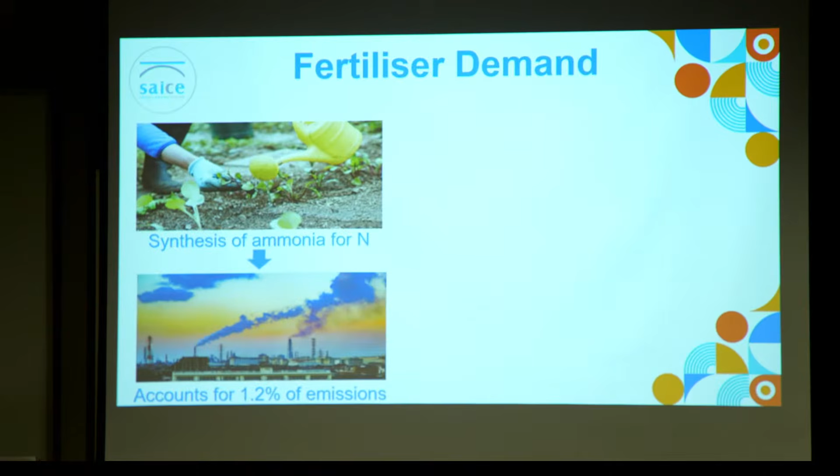Global fertilizer consumption was roughly 190 million tons in 2023, and the three main nutrients found in these fertilizers are nitrogen, phosphorus, and potassium. But producing these nutrients is energy intensive. Ammonia synthesis alone accounts for about 1.2% of global anthropogenic carbon emissions, and phosphorus must be mined from phosphate rock, which is a limited, non-renewable resource, raising sustainability questions about long-term fertilizer supply.

It's therefore important that alternative fertilizer production methods are explored. Now, what if there was a single resource, one we all produced every single day, that could help solve both of these problems? Luckily for us, there is. The solution lies with human urine. Human urine is typically regarded as a waste stream, but from a nutrient perspective, it's actually a gold mine.

It makes up less than 1% of wastewater by volume, but it carries up to 80% of its nutrient load. It also contains the three key nutrients typically found in fertilizers. Furthermore, urine is 97% water, so by recovering the nutrients and the water from urine, we can contribute to broader goals of sustainability and help cities like Cape Town and Johannesburg become more resilient to the growing water security challenges it continues to face. The question that follows this is, where do we do this?

Globally, nutrient recovery from urine isn't new. University buildings, malls, offices, they've all piloted or investigated urine diversion and collection systems. But there is one setting that has not yet been explored, and that is stadiums. Stadiums don't behave like these previously mentioned settings because these settings benefit from a consistent flow of urine, whereas stadiums produce large volumes of urine during events and then nothing in between them. Because of this distinctly different usage pattern, they needed their own modeling and their own analysis.

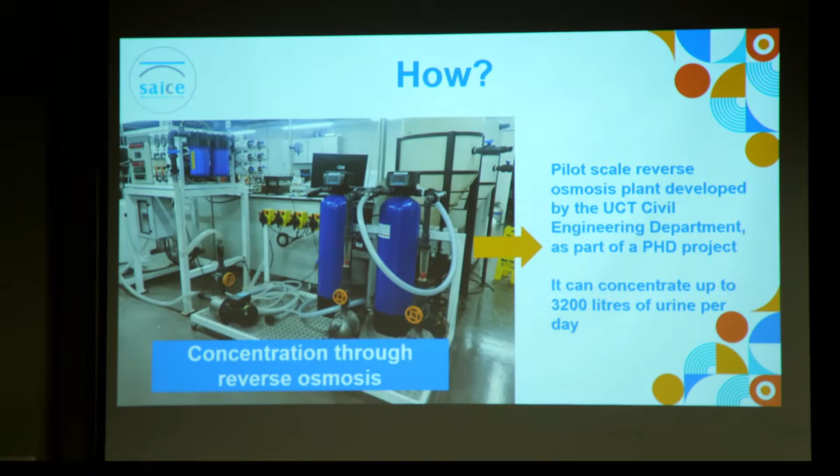The next critical question is, how do we do this? The concentration method chosen for this study was reverse osmosis due to its ability to be applied at scale. Reverse osmosis is the dominant method for seawater desalination worldwide, demonstrating both its reliability and scalability. Reverse osmosis desalinates urine in the same way that it desalinates seawater. It provides us with two product streams: a concentrated nutrient-rich stream, which is the brine or liquid fertilizer, and a permeate, which is essentially just water.

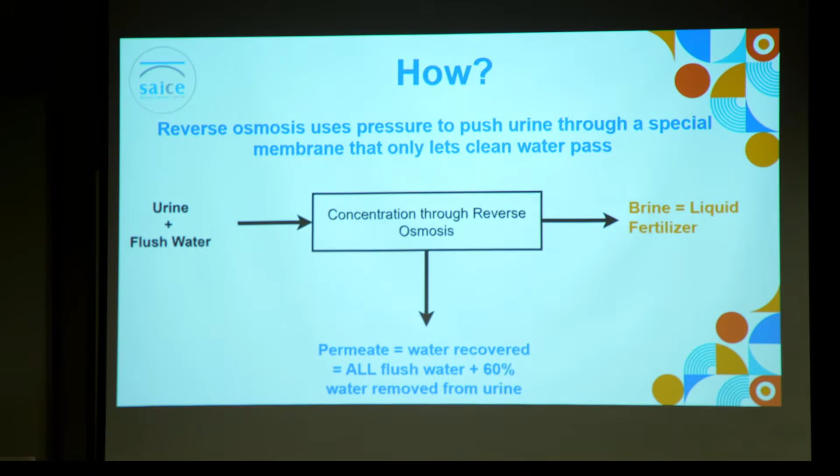Reverse osmosis has the ability to remove all of the flush water that the urine is diluted with, as well as the ability to further concentrate the undiluted urine. For this study, a 60% water removal from the undiluted urine was targeted.

Now, with all that in mind, the core question of my study was refined to this: What is the potential for the Cape Town Stadium to recover nutrients and reuse water on site from urine collected during events? To obtain a clear-cut answer, four objectives were outlined. First was to quantify how much urine the Cape Town Stadium could realistically collect within a year. Second was to estimate both the capital and ongoing operational costs of a practical treatment system. Third was to examine how the dilution of urine with flush water affects feasibility. Fourth was to assess the water-saving potential of reusing the water recovered through reverse osmosis to flush the stadium's urinals.

Sorry, it's just frozen again.

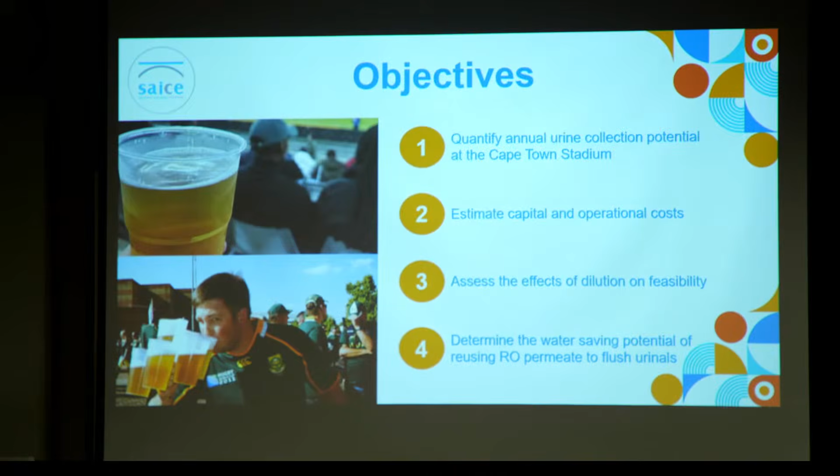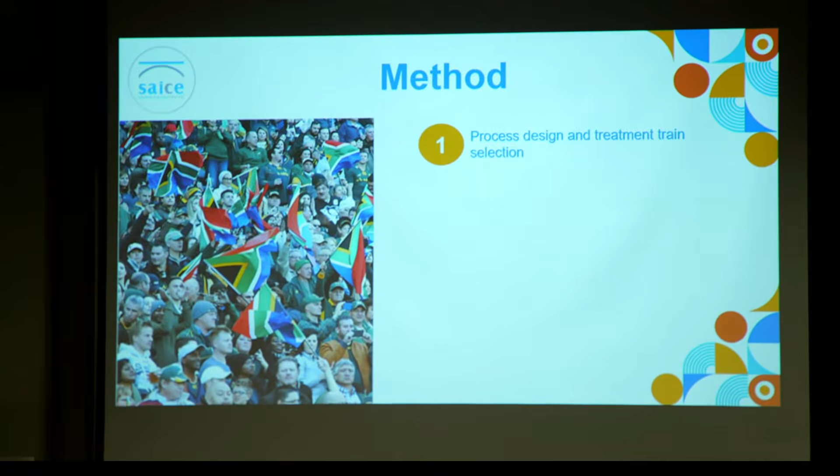To achieve those objectives, the method followed was simple. The study began with designing a treatment train that could be implemented at stadium scale. Next was to gather the data and characterize the site with attendance patterns and fixture counts. With that information in hand, the next step is economic modeling, estimating the capital expenditure, the operational expenditure, and the...

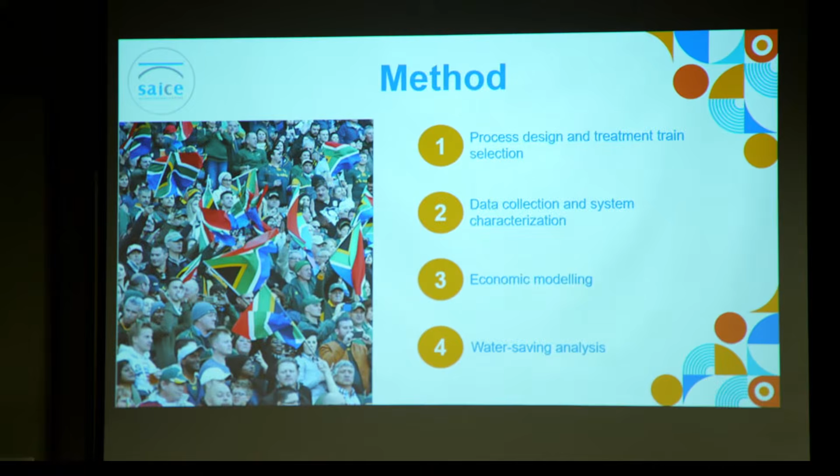revenue potential of the recovered fertilizer. And last, but certainly not least, was the water-saving analysis to quantify how much potable water supply could be offset by reusing the water recovered from reverse osmosis to flush the urinals.

Now let's look at the treatment train designed for the stadium. The fresh urine collected from male urinals only is stabilized with hydrogen peroxide to prevent nitrogen loss. The collected urine is then stored in large collection tanks, and the urine is fed from these collection tanks into the reverse osmosis plant, which can concentrate about 3,200 liters of undiluted urine per day, and it concentrates the urine collected from one event over multiple days.

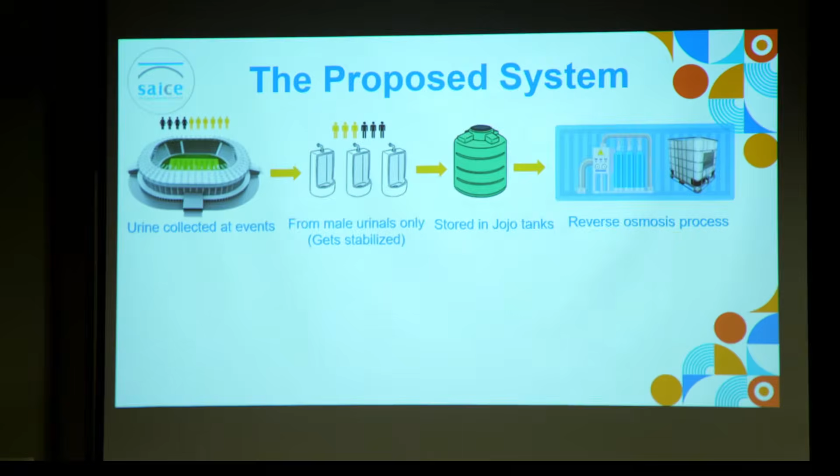The fertilizer produced is then collected in flow bins, and these flow bins are transported to a warehouse facility where the product is packaged and distributed from.

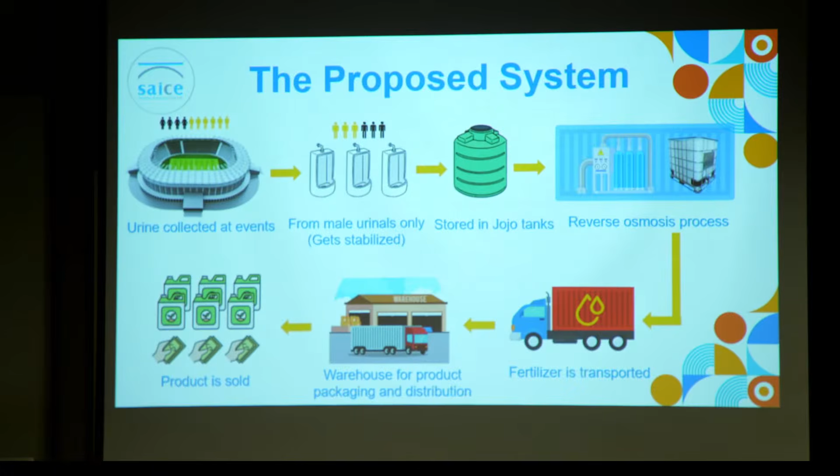This treatment train is fundamentally different from previously done research because it eliminates the need for major retrofitting of existing plumbing fixtures, which significantly reduces the initial capital investment. It uses the urinals in the stadium as is.

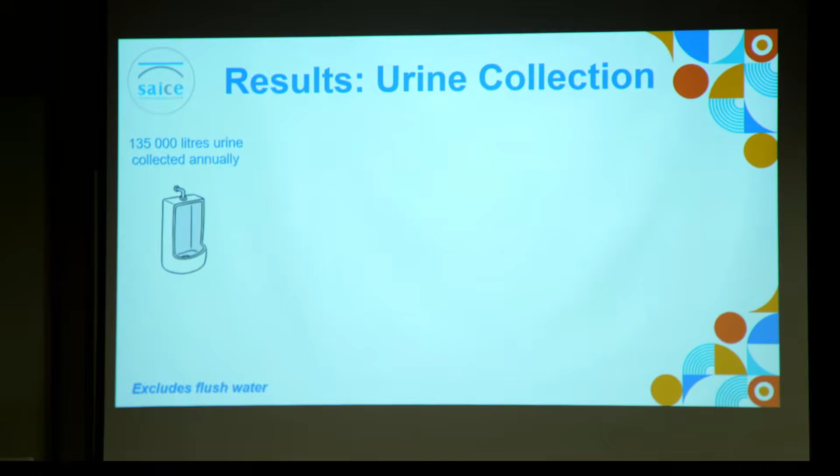Now, let's talk numbers. What I found using the available data for the Cape Town Stadium was that male urinals could yield about 135,000 liters of undiluted urine annually, and by concentrating the stream, we could potentially produce 54,000 liters of liquid fertilizer and recover 81,000 liters of water.

Now let's look at the costs associated with the system. It was found that the modeled system requires an initial capital investment of about 1.47 million rand and has an annual operational cost of 2.9 million rand. And at these costs, the break-even price or the minimum sale price of the liquid fertilizer is approximately 60 rand a litre when calculated over a 5-year investment period.

When we take a look at the fertilizer market, however, it's evident that the fertilizer could be sold at more than double this break-even price when sold to specialist buyers like nurseries or home gardeners. And how did we find that out? So, the weight percent of nitrogen in the fertilizer determines the potential selling price of the fertilizer. The higher the nitrogen content, the higher the price the fertilizer can be sold at.

For a 60% water removal from urine, the weight percentage of nitrogen was calculated at 1.5%. And at this weight percentage, we could potentially sell the fertilizer at 137 rand per litre. And if all the recovered fertilizer is sold at this premium price, the annual revenue can reach as high as 7.4 million rand per year. And this 7.4 million rand annual revenue translates to 4.5 million rand pure profit.

Next, I also analyzed what effect changes in certain parameters would have on the break-even price of the liquid fertilizer, as this would directly affect feasibility. And it was found that the most influential parameters were the operational cost and the volume of fertilizer produced.

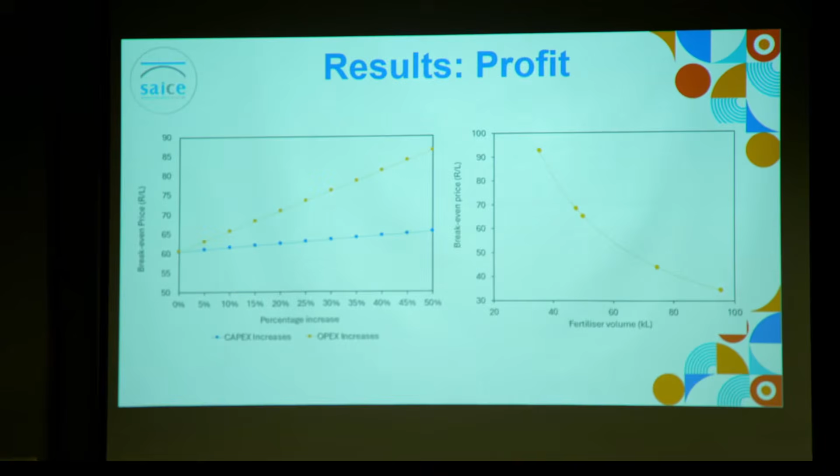Now, let's dive into dilution. Understanding dilution is essential. Dilution is defined as the ratio of flush water volume to pure undiluted urine volume. For example, 100% dilution means that for every 1 liter of urine, there would be 1 liter of flush water, which translates to 2 liters of diluted urine stream.

It's important to note that higher dilution does not change the volume of fertilizer produced annually. Fertilizer production is based on the undiluted urine collection. What dilution does affect is the processing time. The higher the dilution, the longer it takes to produce the fertilizer.

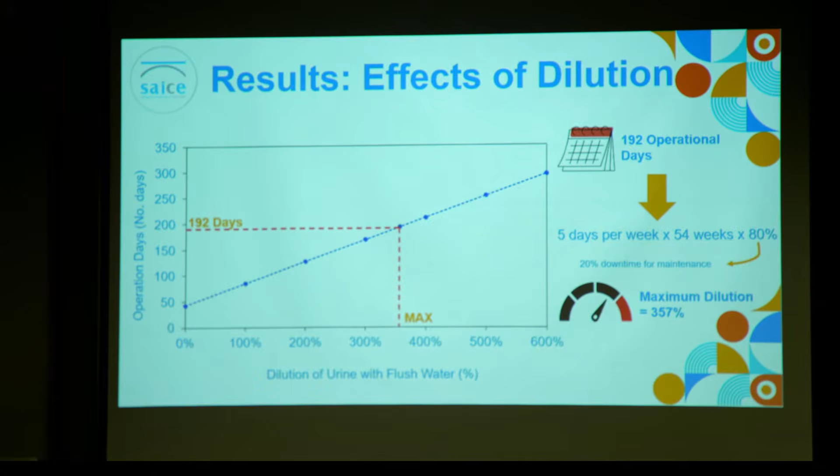The study assumes an annual available operating window of 192 days, so the plant must comfortably process the diluted urine volume within that window. At a dilution of roughly 357%, the current plant with a capacity of 3,200 liters per day reaches the limit of the available 192 operating days, so any dilution beyond this point means we need to increase the plant's capacity.

And finally, the water saving results.

Frozen again. Okay, I want everyone to picture this.

The Cape Town Stadium on a sold-out night. Over 50,000 people watching the Stormers versus the Bulls. The Stormers lead by 5. The lights are flashing and the crowd is cheering. However, behind this spectacle, hundreds, if not thousands of liters of clean drinking water gets flushed away between halves and at the end of the match as everyone leaves the facility without giving it a second thought.

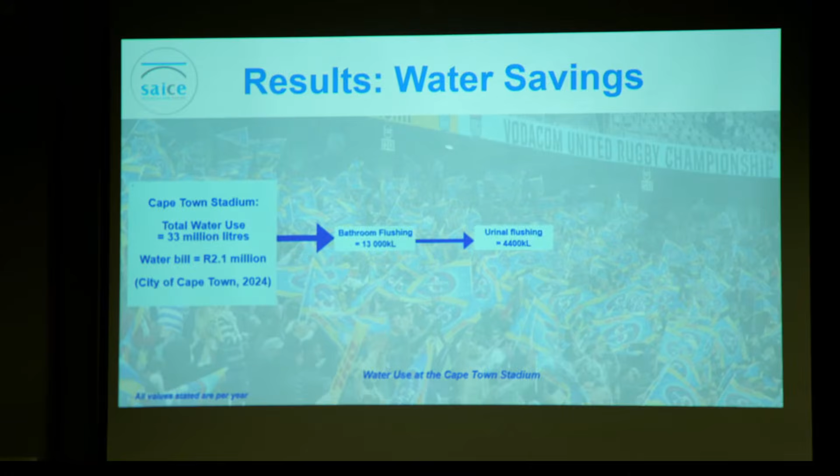This routine behavior is exactly where the challenge lies and where on-site water reuse can make a practical difference. In the 2023-2024 financial year alone, the stadium used 33 million liters of water, of which 4.4 million liters can be attributed to the flushing of male urinals.

Usually, water reuse systems need to supplement water losses in the system, either due to leakages or evaporation, with some form of municipal water supply. This reuse system, however, is truly circular. The extra water removed from the undiluted urine covers any potential losses that may occur in the system, removing the need for municipal water supply entirely.

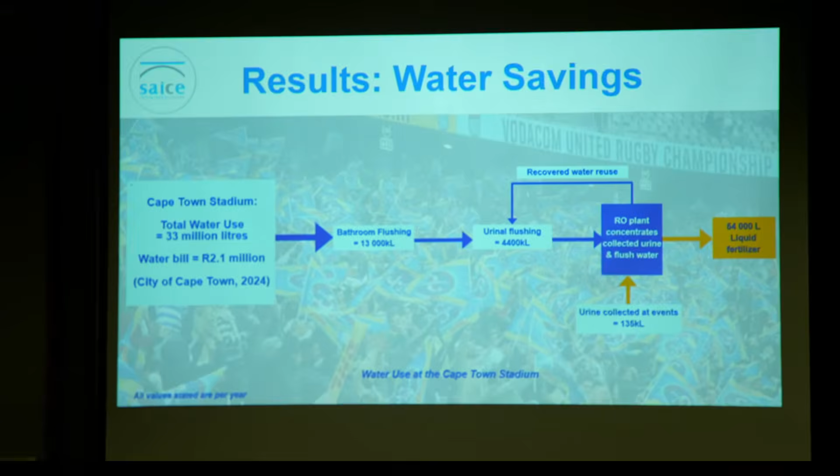For the model system, the water reuse for the flushing of male urinals could save the stadium up to 277,000 rand per year, meaning that through water savings alone, you could cover the initial capital investment cost of the plant within 5 years. Now, based on these results, the next logical step is implementation at the Cape Town Stadium.

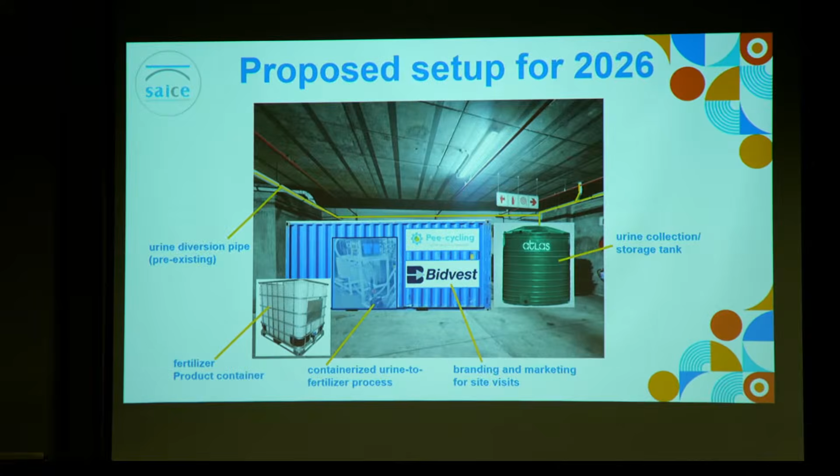The first installation has already been confirmed for this year, supported through partnership with Bidvest, who are working directly with UCT as the stadium's facilities manager. A JoJo tank has already been installed on site, marking the first physical step towards bringing the system into operation.

This research also supports several sustainable development goals as defined by the United Nations, in particular SDGs 2, 6, 11, 12, and 14. How does it do this? For SDG 2, it helps strengthen food security through the local production of fertilizers. For SDG 6, the system improves water management by reducing pressure on wastewater plants and making water reuse more efficient. For SDG 11, it applies circular economy thinking, helping us turn waste into a useful resource.

For SDG 12, it promotes a more responsible way of producing fertilizers. And finally, for SDG 14, diverting the urine from the sewers reduces nutrient runoff into oceans and rivers and protects the ecosystems in these water bodies.

This research also fulfills the 3 ESG principles, and fulfilling these principles was essential for our partnership with Bidvest. Environmentally, it reduces nutrient pollution in water bodies and lowers stresses on potable water supply. Socially, it turns urban settings like the Cape Town Stadium into visible examples of sustainability and supports nearby farmers by producing fertilizers locally.

From a governance perspective, the system is designed around safety, transparency, and clear monitoring, encouraging strong partnerships between local government, sponsors, and researchers.

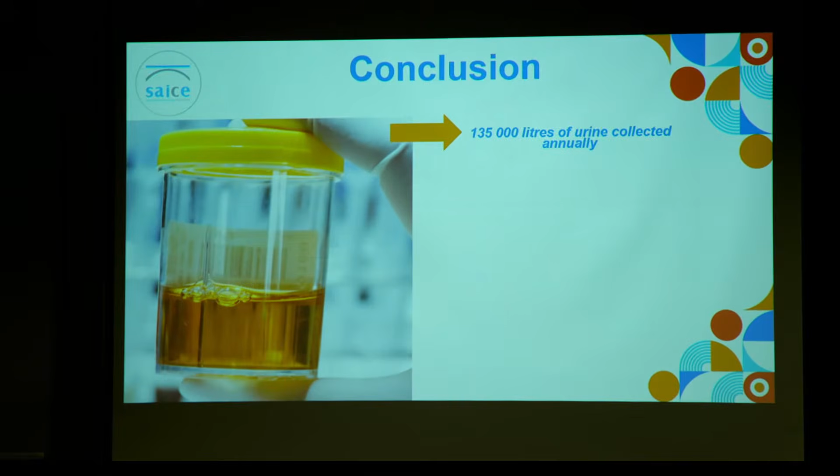In summary, the analysis shows that the Cape Town Stadium could potentially collect 135,000 litres of urine a year, which can be concentrated into roughly 54,000 litres of liquid fertilizer. If all this fertilizer is sold at competitive market prices, we could achieve an annual revenue of up to 7.4 million rand a year.

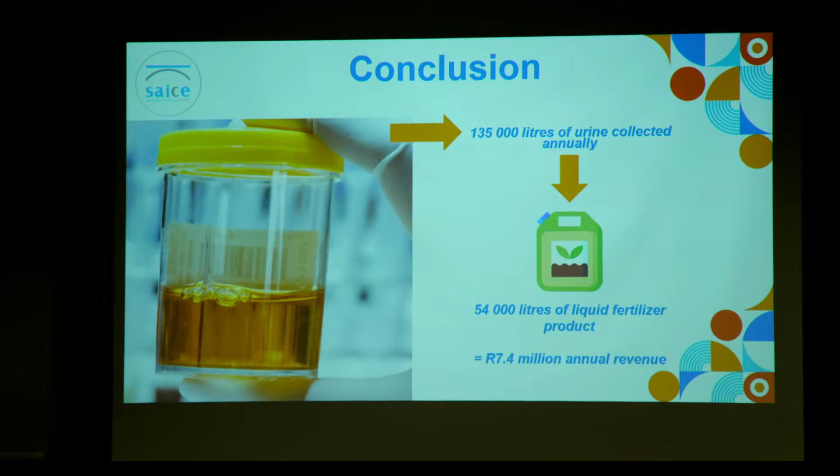There's also the added benefit of an estimated 277,000 rand a year saved if the water recovered from reverse osmosis replaces the potable urinal flushing water supply, which could cover the capital investment of the plant in 5 years.

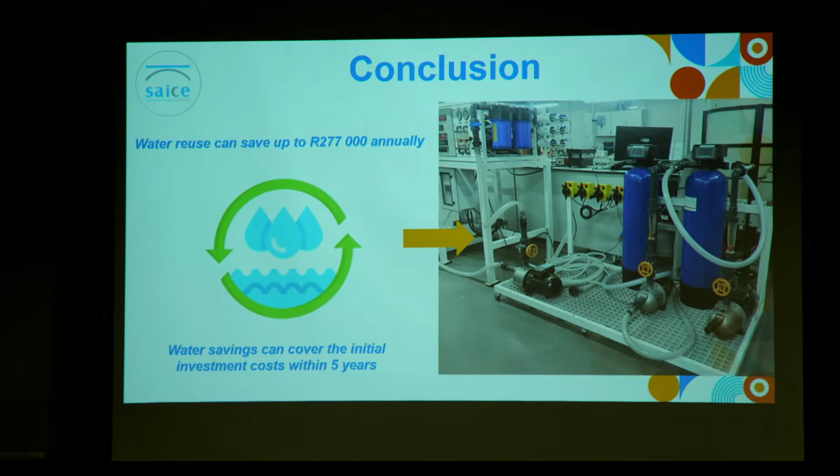This project has the potential to turn the stadium into a visible example of sustainable urban practices, helping cities like Cape Town take a meaningful step towards net zero waste. But the bigger picture is that stadiums are only the starting point. The same model for on-site nutrient recovery and water reuse can be applied in various other contexts, particularly in new large commercial and office developments, hospitals, other event-based venues, and can even be implemented at festivals with portable urinals, where plumbing and services can be designed or arranged to accommodate this kind of treatment system. When implemented in the right context, the model system can scale far beyond a single venue.

The opportunities are endless. I leave you with this: you never change things by fighting the existing reality. To change something, build a new model. Thank you.

Thank you very much, Akila. The only comment I have is that I just couldn't picture that the Stormers were leading by 5. But guys, could you please do 5 minutes of questions? If the judges have any questions first, could you do some questions, and then if the judges don't have questions, we might open up the floor to the audience.

Congratulations on that brilliant presentation. I think it was very thorough. Clearly got the technical acumen. Let me assist you.

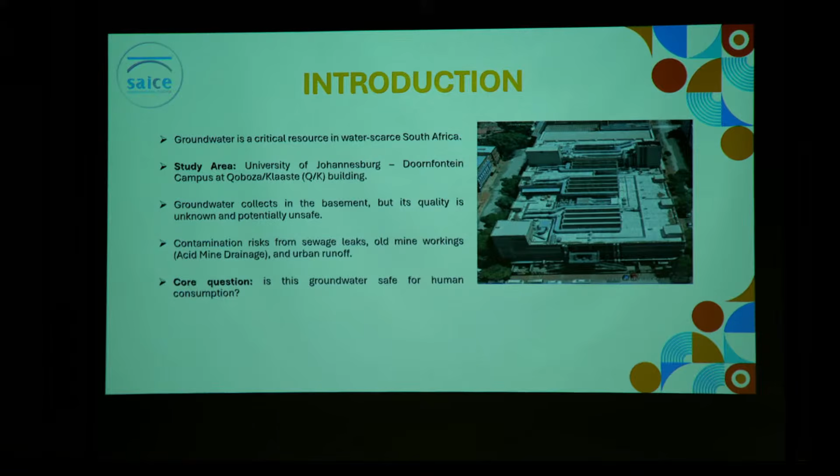Contamination of this groundwater can come from sewage leaks, urban pressures or runoff, or old mines, as we know Johannesburg was covered by old mines. This brings us to the core question: is this groundwater safe for human consumption or not, since students are using it and we don't know?

Moving to the problem statement, which goes hand in hand with my introduction: yes, we do have water that collects at the basement, but is it safe or not?

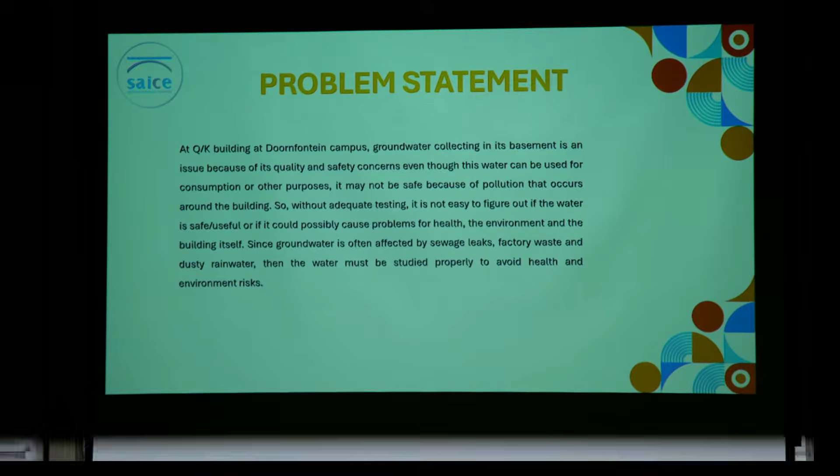This research project has aims and objectives. My aim was to comprehensively assess the quality of this groundwater collecting at the basement and compare it to SANS 241 of 2015. My key objectives were first, to analyze the physical, chemical, and microbiological parameters; second, to identify the key sources of contamination affecting the groundwater students want to use; and third, to provide actionable recommendations for management of this water.

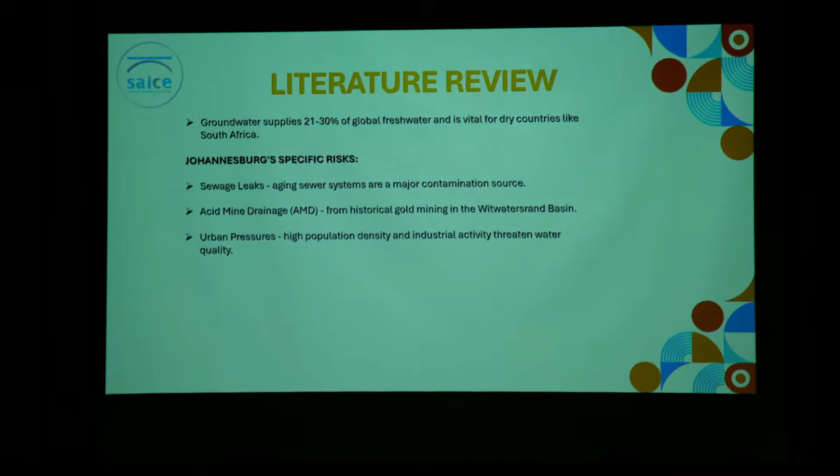Moving to the literature review, based on what other authors have found: groundwater supplies approximately 21 to 30% of global fresh water, and is a crucial source in dry countries like South Africa. I also found that Johannesburg faces specific risks such as sewage leaks, acid mine drainage, and urban pressures.

Moving to the methodology I used, which is divided into two parts: first, research design and sampling, and second, laboratory analysis.

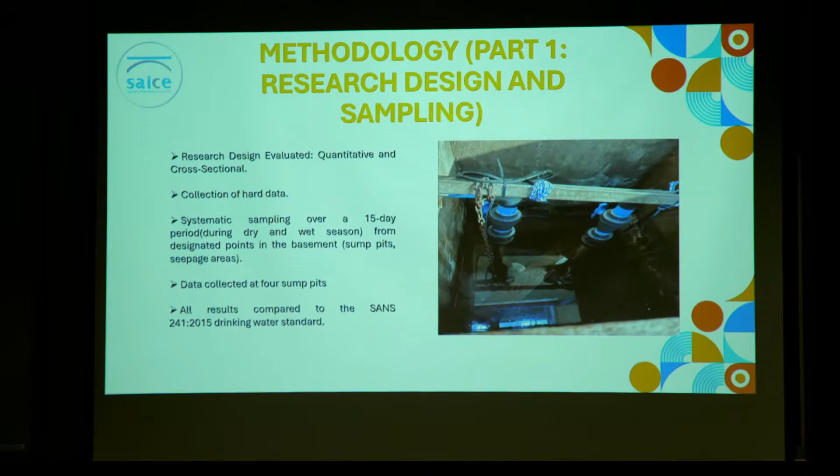I systematically gathered data over a 15-day period during both dry and wet seasons, and compared all these results against the SANS 241 of 2015 drinking water standards.

Then I'll quickly move on to my methodology part 2, which is laboratory analysis. This is where I tested my physical, my microbiological, and chemical parameters.

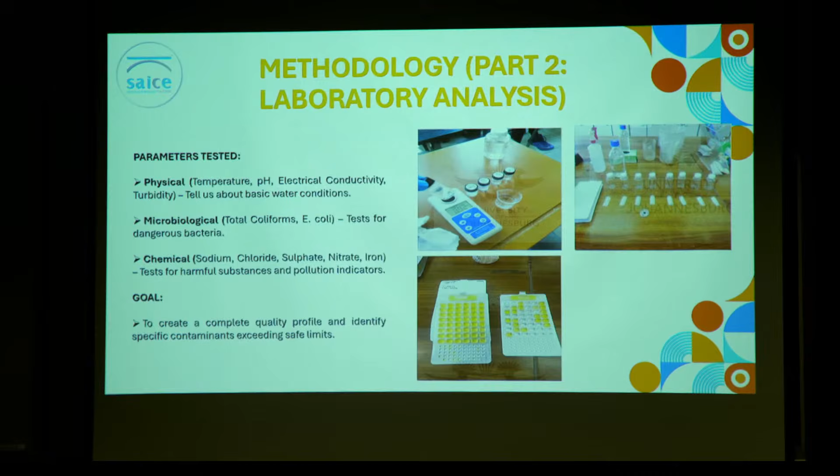My physical parameters tell us about the basic water condition. My microbiological test is for dangerous bacteria, and my chemical test is for harmful substances, indicating what type of pollution it is. The goal was to create a complete quality profile and identify specific contaminants that are exceeding safe limits.

Moving on to my results, I'll start with the physical parameters, which tell us about the basic water conditions. Here I had to test for pH, electrical conductivity, and turbidity.

If you check electrical conductivity, all my samples were okay because they were not exceeding 170 according to SANS 241. If you check my turbidity, some samples were okay, some were not, meaning that this water might have been contaminated by acid mine drainage.

If you check my pH, almost 90% of the values were fine, except on day 5, which had a value of 4.13. This shows that the water is highly acidic. What was the cause? When I went there to take my samples, as I've said, it involves the collection of hard data.

When I went there, there was heavy rain. I wanted to check how groundwater, and also the water table, reacts to heavy rainfall. That is why my pH decreased to 4.13. But the others are all right, falling within the range of 5 to 9.7 according to SANS 241.

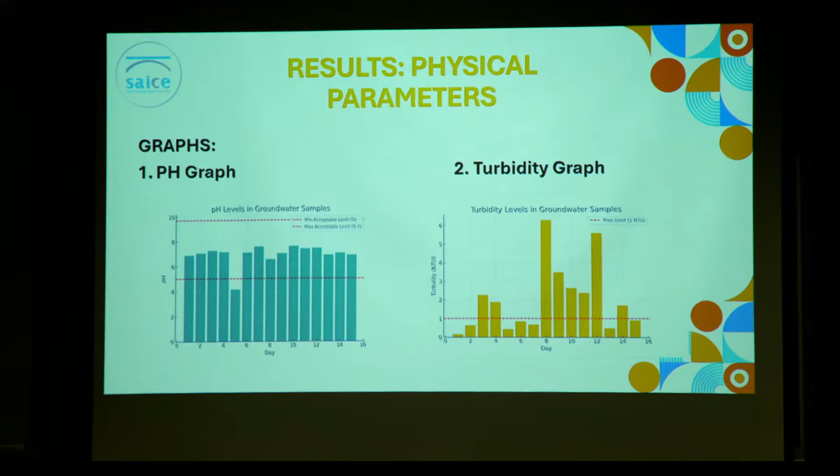Then we have the turbidity graph. As I've said, 50% were good, 50% were not good, also indicating that this water has a big problem. Then I'll quickly move on to my microbiological parameters.

These tell us about the pathogenic organisms. This is where I tested my total coliforms and my E. coli. If you check, all my total coliform values were not okay, exceeding the limit of 10.

This alone indicates that the water is being contaminated or affected by the broken sewages that we have at Johannesburg. My E. coli was supposed to give me 0, or somewhere less than that. Some samples were high, and we even have a very high value there.

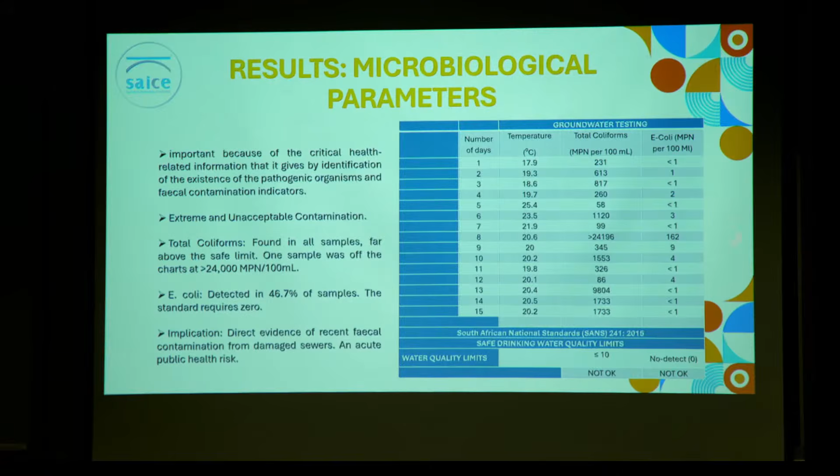Then moving on to my chemical parameters, which is divided into 2 parts. Here I had to test my nitrate, sulfate, sodium, iron, and chloride. All 4 testings were fine, but I had one critical failure when I tested my sulfate. My nitrate was found to be okay.

My nitrate was found to be okay. My sulfate was not okay. My sodium was okay, with all values less than 200. My iron values were all less than 300. Chloride was less than 300 according to SANS 241.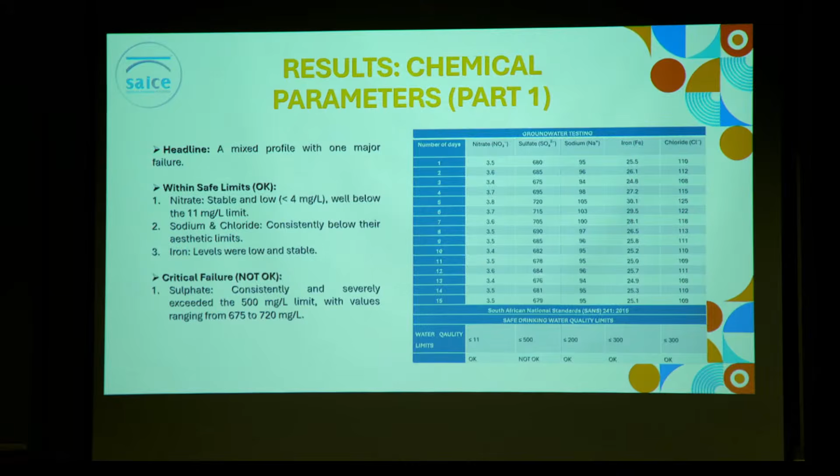But I had one critical failure, which is sulfate. All samples were ranging from 675 milligrams per liter to 720 milligrams per liter.

Moving on to part 2, where I will discuss this critical failure. What was the problem? All these levels were approximately 35 to 44% above the SANS 241 limit. Not even one sample was within the range according to SANS.

What does this mean? Why am I getting this? This indicates that this water has a chronic source of contamination, most likely sewage and acid mine drainage from the historic Witwatersrand Basin gold mines. Other possibilities could be urban runoff or urban pressures and other things, and this can also cause bad taste.

So moving on to my recommendations and conclusions.

My conclusion is that this groundwater is unsafe for human use or for students without extensive treatment, meaning we have to treat it using chlorination and add lime. I also found that the major source of contamination is the leaking sewer.

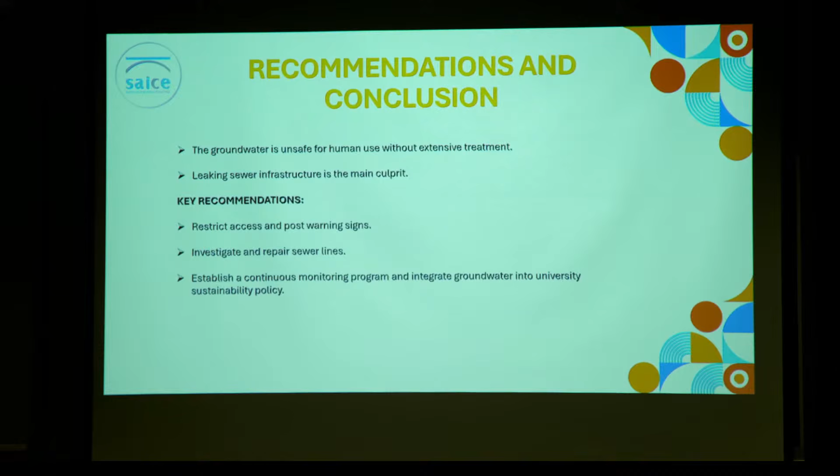My key recommendation is to restrict access and post warning signs. Since it's a university student building, we have to post signs at the bathrooms saying do not drink this water, as it is not safe for human consumption.

We also have to investigate, as the university, and repair the sewer lines, because there are a lot of damaged sewer lines. Then we also have to establish a continuous monitoring program and integrate groundwater management into the university's sustainability policy.

Meaning we have to set up maybe a 30 minute to 1 hour program where we educate students about this groundwater.

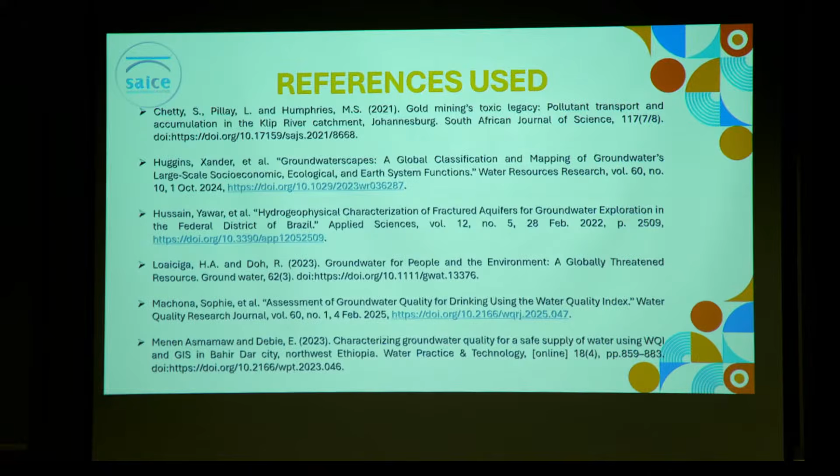Thank you very much for that wonderful presentation. Could we please open the floor up to questions from judges first, and then if we still have time, we'll go to everybody else. That was a very good presentation, and the floor is open.

Thank you for the presentation. You mentioned twice in the presentation that students are already using this water. We then saw that your research concluded the water is unsafe. You mentioned your recommendations were to restrict access, have warning signs, and educate the students. Has any of those three items actually been done?

Has the signage been put up and access restricted? Since this research was done last year, and I was the first one to find out if this water is safe or not, signs were not there before, but now the university is planning to put signs on the bathrooms because this water is being used there. We don't have taps where students can just go with a bottle and pick up and drink. So the signs are being put up right now.

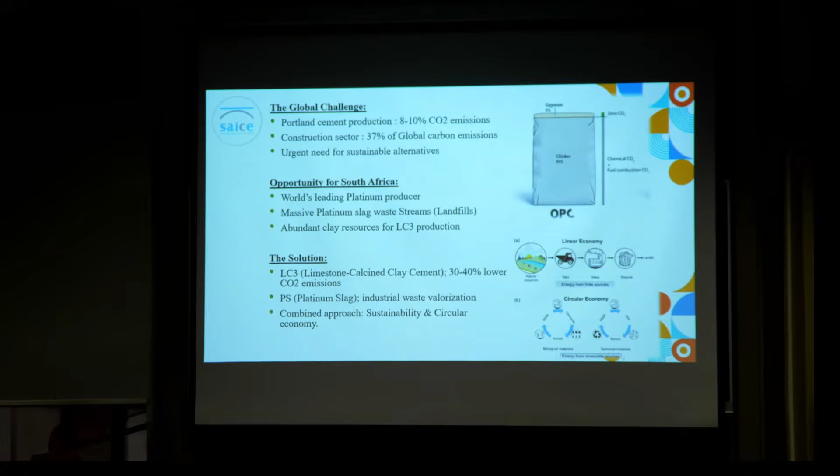We also look at the abundant clay resources available within the country to produce elements such as limestone calcined clay. So the solution came about to take these two materials: limestone calcined clay, which I'll refer to as LC3, and also the platinum slag waste.

The limestone calcined clay has the goal to reduce carbon emissions when replacing Portland cement, and the platinum slag would replace our general or fine aggregates within the concrete mixture. This would also promote industrial waste valorization or recycling within the country.

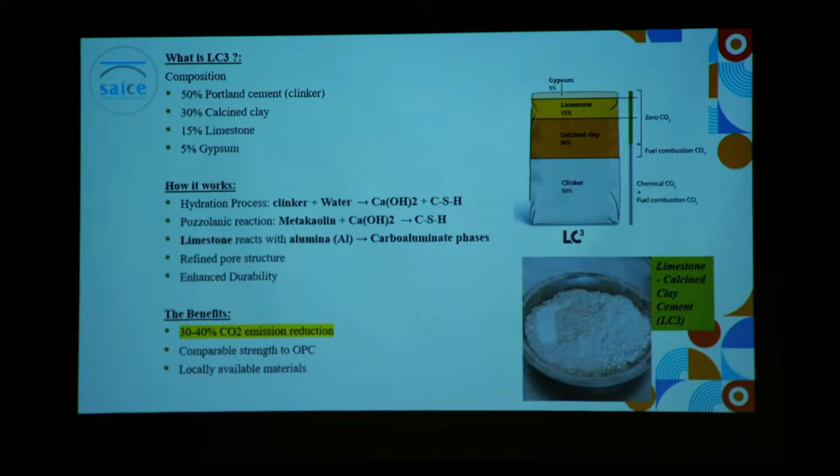Now getting into the first of our study materials, LC3, limestone calcined clay, is an engineered blend containing 50% of normal Portland cement, also including calcined clay, limestone, and gypsum. How it actually works: we start with the hydration process where the clinker content from the Portland cement reacts with water, forming Portlandite, supported by the cementing phase, the calcium silicate hydrates.

The Portlandite produced then goes on to react with the metakaolin, which results from introducing our calcined clay. That metakaolin reacting with Portlandite creates secondary cementing phases, additional bonds within our concrete mixture. Then the limestone reacts with the alumina to form our carboaluminate phases - compounds responsible for refining the pore structure within our concrete mixtures.

Looking at the benefits of using this material: it reduces our carbon emissions by up to 40%, while also giving comparable strength with Portland cement. We are also using locally available materials in this instance.

The second material we are looking at is the platinum slag waste, which is a byproduct of the platinum smelting process, present in abundance currently in our country. We look at its composition with its major and minor oxides, but most interestingly, the amorphous silicates and glass matrices, which give us the benefits of that spherical and glassy morphology.

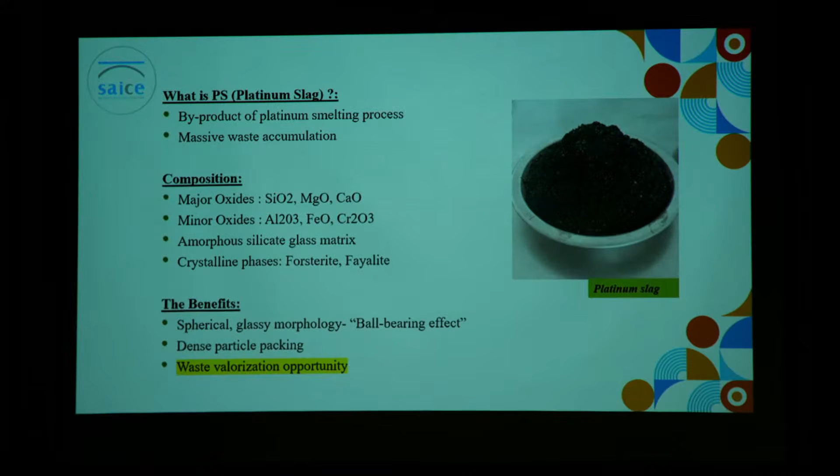This gives us that ball-bearing effect - a reduction in friction within our concrete particles and aggregates, introducing increased workability within the concrete mixture. There's also the benefit of denser particle packing within our aggregates, and the key benefit of valorizing industrial waste being produced in the country.

So to set up the goals for the research: to conduct a comparative investigation on the durability performance and microstructure of the conventional paving block versus the block incorporating our replacement materials at 15% and 45% levels. The Portland cement will be replaced with LC3, and the river sand will be replaced with platinum slag waste.

The experimental methodology I developed before going into the lab was to develop our design mixes, which included 3 of them. The first was the control mix, or benchmark mix, with 0% replacement of Portland cement and river sand. The second and third mixtures replaced it with 15% and 45% respectively.

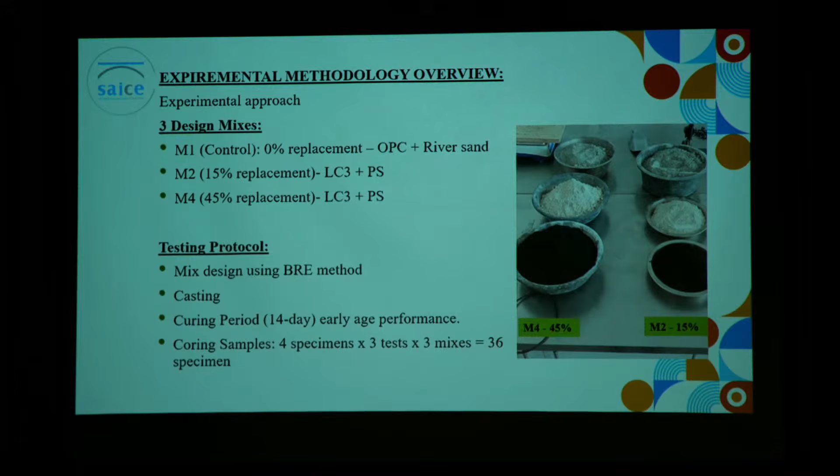To get down to the durability itself and really get the results, the indices we used were firstly oxygen permeability, which determines the resistance for cement-based materials to repel or resist the ingress of oxygen within our concrete samples. Secondly, water sorptivity, which determines the hindrance occurring within that water path due to capillary suction of the surface specimen. And lastly, chloride conductivity, which determines the resistance to penetrating chloride ions within our concrete mixture.

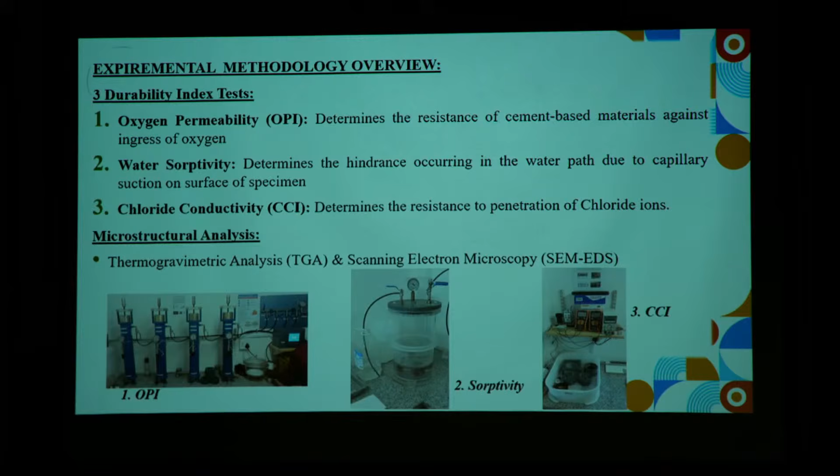The microstructural analysis would then be done to validate our results. Those analyses include the TGA and the SEM analysis.

The procedure followed was as follows: cast in cubic molds, follow a standard procedure of vibration, then cure in the water bath for an early age of 14 days. The specimens were then extracted, cored and saw cut to specific dimensions according to standards, followed by the durability testing of our specimens.

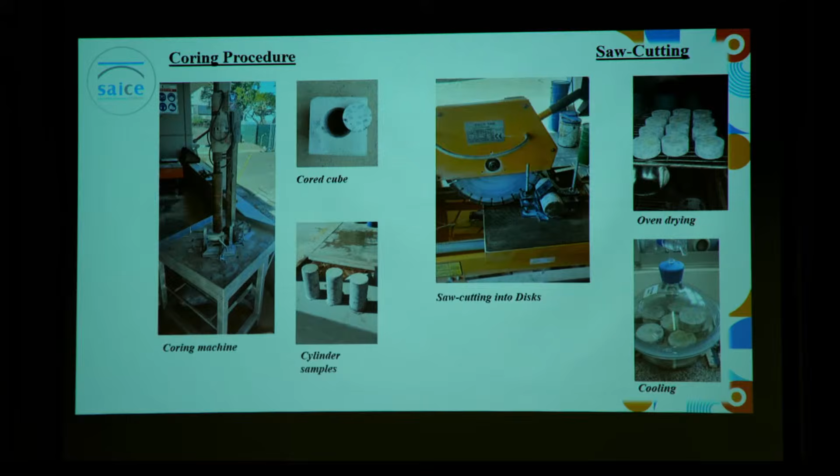So this was just our procedures followed. On the far left-hand side is the procedure of coring our specimens, followed on the right-hand side by the saw cutting of our materials in the lab.

Material characterization was key in order for us to understand the results we would obtain. The key findings here within the SEM analysis is that with the limestone calcined clay, the LC3, it was dominant with our metakaolin and reactive phases, resulting in major pozzolanic activity. With the platinum slag, it gave off favorable physical properties, with forsterite and crystalline phases present there.

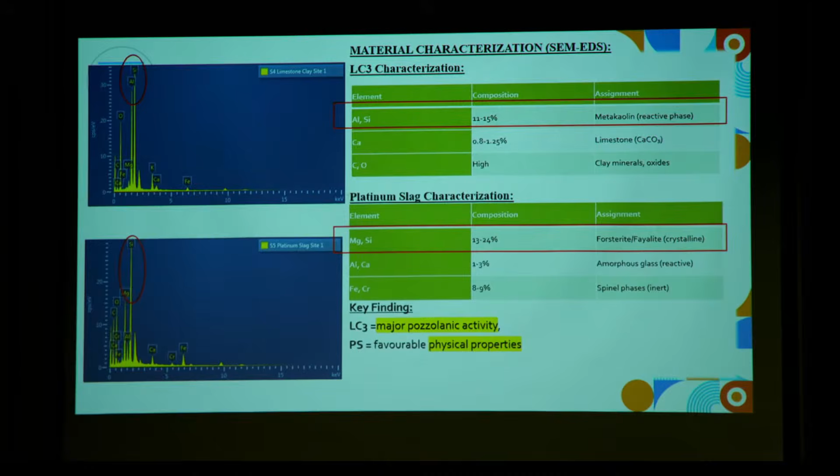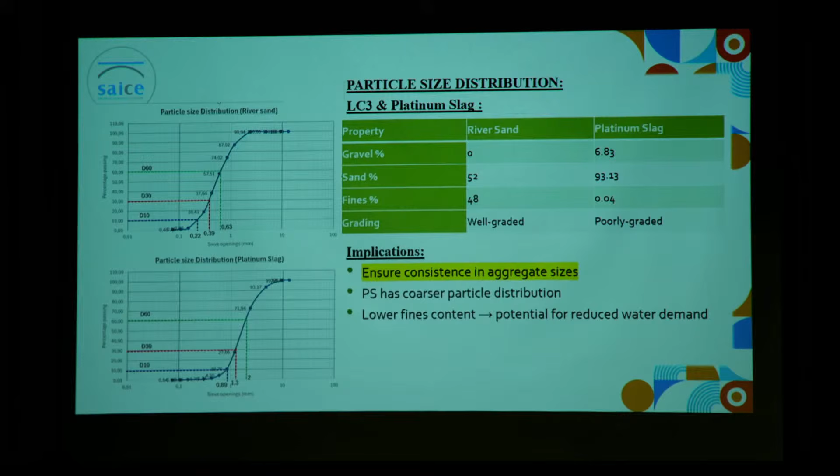Particle distribution was also necessary in order to ensure consistency throughout our mixtures when replacing the Portland cement and river sand and introducing our platinum slag, to ensure that we're replacing with the same amount of fines and larger aggregates.

For the fresh concrete properties, we witnessed that workability improved as we introduced our replacement levels, especially our platinum slag. It improved the workability and flow of our concrete mixture due to the ball bearing effect mentioned earlier, which reduces friction due to the spherical composition of the platinum slag. The practical advantage of this ball bearing effect would be that our water to cement ratio could then be reduced, potentially using less water within our concrete mixture.

Getting into the durability index results, the key findings for that 14-day analysis period was that throughout all our mixes, we identified generally poor results, particularly due to that 14-day analysis, because we normally wouldn't do a durability performance for such a short period of time, but I'll explain as I go further. When we look at M1, the benchmark control mix, we saw the highest OPI due to carbonation within that mixture. Our two design mixes, M2 and M4, with the replacement levels, showed the highest permeability in terms of OPI.

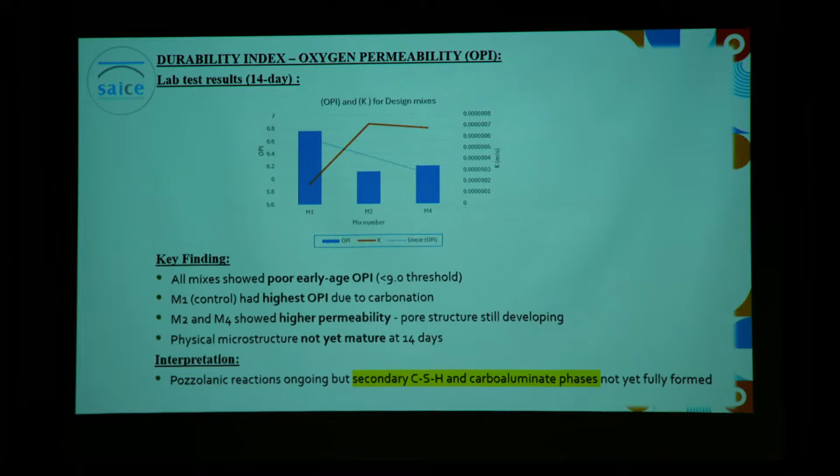This is due to the fact that at this early stage, the pore structure is still developing. It is still at a transitional stage, not yet fully matured. The secondary cementing phases occurring here, due to the metakaolin reacting with the portlandite, are still not yet fully formed to create those secondary cementing phases and carboaluminate phases needed to refine our pore structure.

The second of our indices is the water sorptivity along with the porosity. The findings here were that, similar to the OPI, we were having generally poor results, which was high sorptivity within our concrete mix itself. However, M4 had the highest porosity, yet the lowest sorptivity.

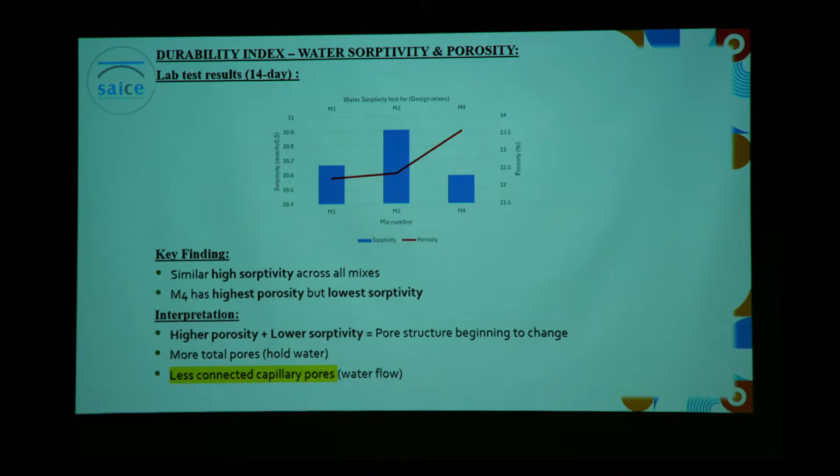If we were to interpret this result, we'd see that due to that higher porosity and lower sorptivity, the pore structure is in a transitional state. Although it is not fully refined with those carboaluminate phases, it is no longer interconnected capillary pores. So the transmission of water is no longer being permitted within our concrete sample.

And then we ended off with our chloride conductivity index, where we saw a progressive improvement when replacing our study materials in our concrete mixes. What we found with the M4 mix was the best performance in terms of chloride conductivity index, meaning it was resisting chloride ingress.

Now this was kind of confusing, because with the other specimens and other tests, like sorptivity and OPI, we were having poor results, but the chloride conductivity was generating much better results.

This was due to the fact that the physical pore structure is still in a development stage. However, if we look at the chemical microstructure, we're already witnessing chemical benefits from introducing our limestone calcined clay.

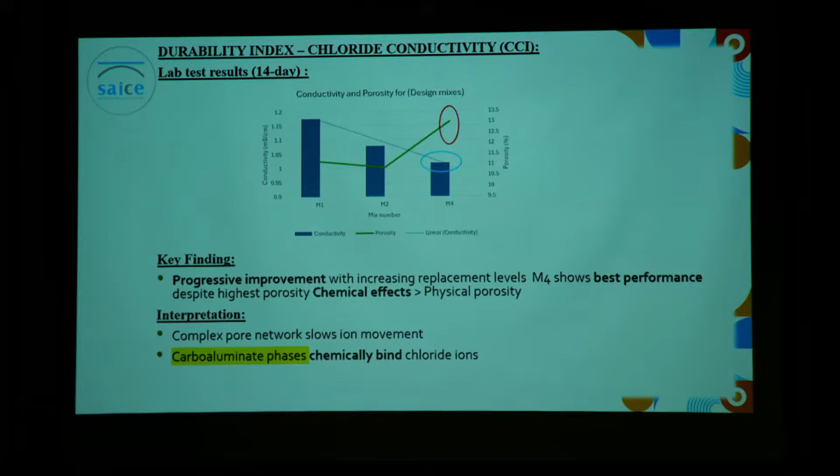This was verified with our microstructural analysis, the TGA, which showed that at that early stage, our LC3 is consuming the portlandite to form additional cementing phases, supporting what I said - that at that early stage, the portlandite is still being consumed, so we're having a temporary increase in pore structure.

However, because we're already developing carboaluminate phases, these phases are binding chloride ions and restricting the ingress of chemicals within the concrete mixture. So with M1, the cementing phases are being generated at a moderate level, and this increases as we go up the replacement levels.

Closing off, what the research really shows is that at the 14-day period, we are still at a very transitional stage, so we cannot get very conclusive results. However, we do see that the physical microstructure is at a transitional state, developing in terms of OPI and similarly with sorptivity.

However, with the chemical microstructure, we are already seeing the benefits of introducing our LC3 in our mixes, with the chloride binding mechanism restricting chloride ingress. So that disconnection - sorptivity and OPI showing poor results when replacing our study materials, but chloride conductivity showing good results - shows that even at this early stage, our chemical microstructure has already developed very much.

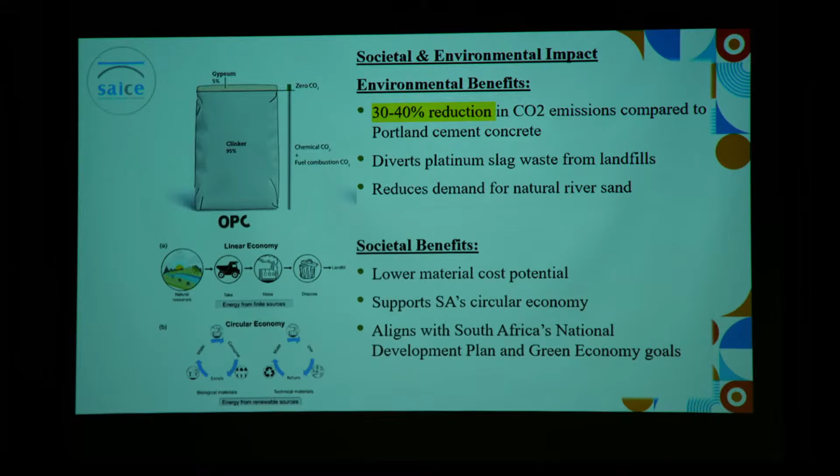To close off with research limitations and recommendations: as you'd anticipate when doing research, a lot of things can go wrong, which I did find during the semester carrying out my research. That's why I stuck with early age analysis - you typically don't do durability performance analysis on the 14th day. Never. We're talking about 28 days, up to 90 and even more. That's when we're talking durability.

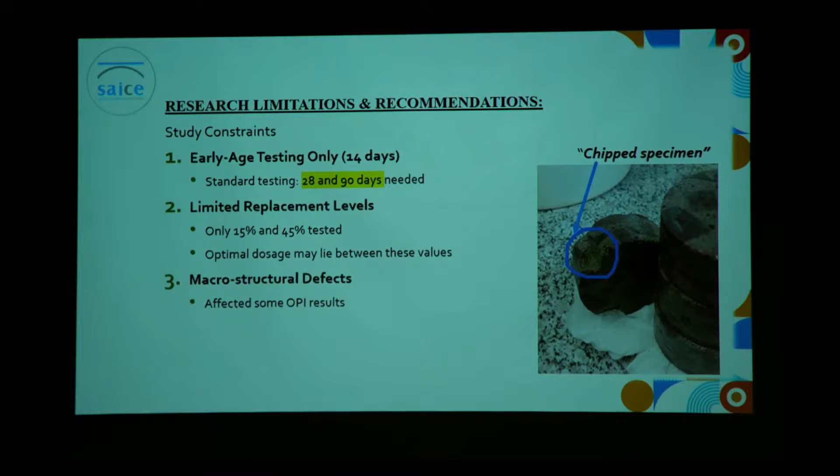However, due to those unforeseen circumstances, I had to make something out of my research, so I decided to reshuffle my objectives and really look at the development stage, the early stage of our concrete mixtures. That limitation influenced the number of replacement levels I had, 15% and 45%. I couldn't find the optimal dosage of replacement, as it could be lying between 15 and 45%. However, we deemed our results promising, as we had seen some benefits.

And just to close off, macro-structural defects were just some of the limitations we faced in the lab. However, our results were recalibrated to suit our analysis. Thank you very much for your time and attention.

Thank you very much, Michelle. That was a very insightful discussion on concrete. From my side, I also do some research in concrete, so I had some comments I wanted to share. But in the interest of time, we can only take some questions from the judges. So let's let the judges ask some questions and then proceed to our next one.

Thank you very much for that presentation. I enjoyed right there when you're covering your limitations, the honesty and that cautious optimism attached to them. I only have one question. It's a very chemically convincing idea, and I'd like to find out, considering that your platinum slag waste has different chemical and mineralogical properties against your natural aggregates, has the study evaluated risks such as alkali silica reactions, or concrete cancer as they call it, under South African conditions when combining this with your LC3? I know it's a long-term thing, and I've seen under your limitations you've captured something, but nothing was talking to this. Is it something you've considered, or at least taken cognizance of moving forward?

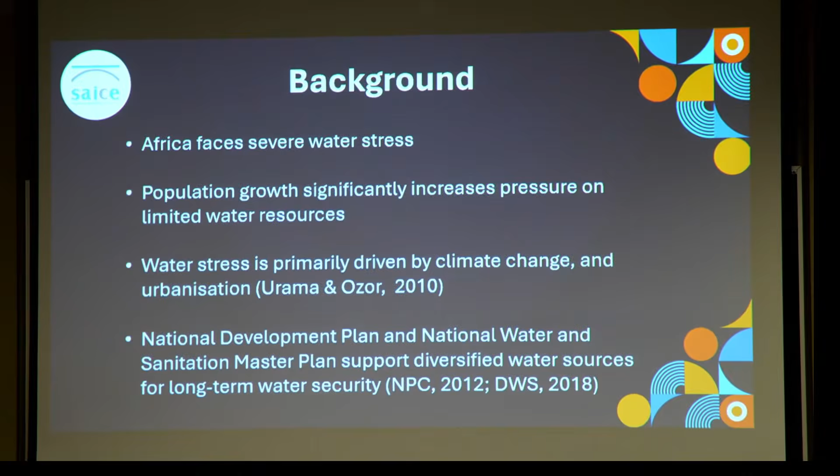The National Development Plan and the National Water and Sanitation Master Plan highlight the need to optimize South Africa's water resource mix and promote non-conventional supply options beyond traditional surface water sources to ensure long-term water security. Long-term alternative strategies include better use of groundwater, stronger water demand management, expanded water reuse, and desalination. In this project, desalination was explored as the alternative supply strategy.

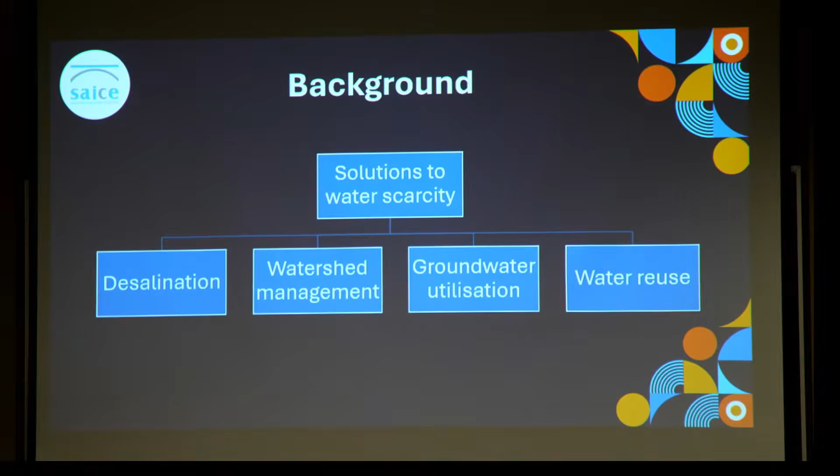Water desalination is the process of removing salts and other minerals from seawater or brackish water to make it suitable for human use. Several methods exist, with thermal techniques like multi-effect distillation and multi-stage flash relying on heat to evaporate and condense water, but these require high energy input. Due to the global need to conserve energy, reverse osmosis has become the dominant approach.

Its principle is simple but effective: by applying pressure, saline water is forced through a semi-permeable membrane, leaving salts and impurities behind. Today, reverse osmosis accounts for nearly 70% of the world's desalinated water supply. However, it is not without flaws. Arguably, its biggest flaw is membrane fouling, wherein particles, microorganisms, or other materials accumulate on or within the membrane, reducing its efficiency.

To address this, researchers have explored incorporating polyionic liquids into membranes to improve their structural strength. Ionic liquids are charged compounds that remain liquid at relatively low temperatures. Polyionic liquids are polymers that integrate ionic liquids into their structure, combining the chemical stability of ionic liquids with the structural integrity of polymers, making them suitable for improving reverse osmosis membranes.

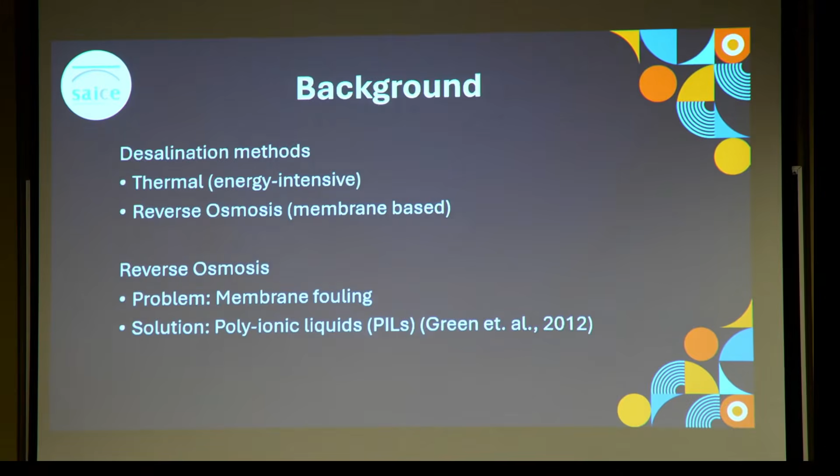Researchers have conducted many studies on the effect of polyionic liquids on membranes, and this research has shown that excessive amounts of polyionic liquids can actually be detrimental to membrane performance, as it compromises the selectivity of the membranes. However, all of this research focuses on remaining safely below that upper limit. In contrast, our study deliberately approached this threshold, aiming to identify the precise point at which performance begins to decline, a boundary that has not yet clearly been defined.

This leads us to a question: how much PIL can be incorporated into reverse osmosis membranes before performance begins to decline, and what structural changes might occur as a result? To answer this, our objectives included fabricating reverse osmosis membranes with varying percentage rates of our PIL of choice, characterizing the surface properties of these membranes, and testing their performance to determine how efficiently they function under operating conditions.

To achieve the objectives of the project, the methodology was divided into three parts: membrane fabrication, membrane characterization, and performance testing. For the membrane fabrication step, two processes were carried out: first, casting the support membranes, and second, forming the polyamide layer, also known as the active layer, on top of the support membranes using interfacial polymerization.

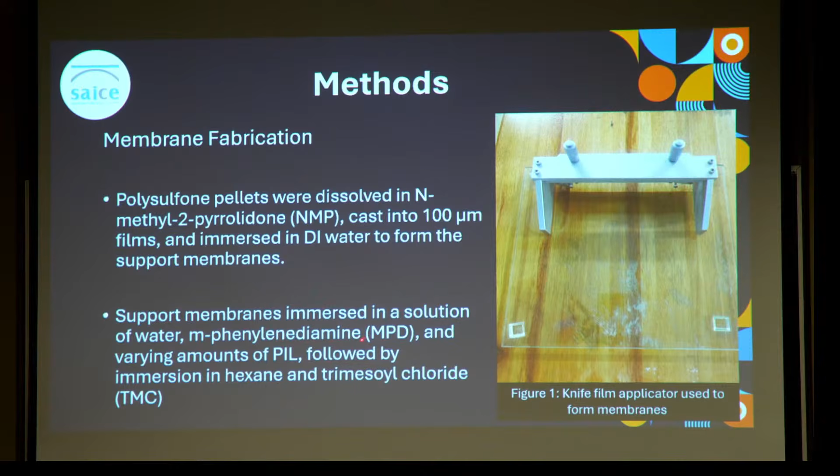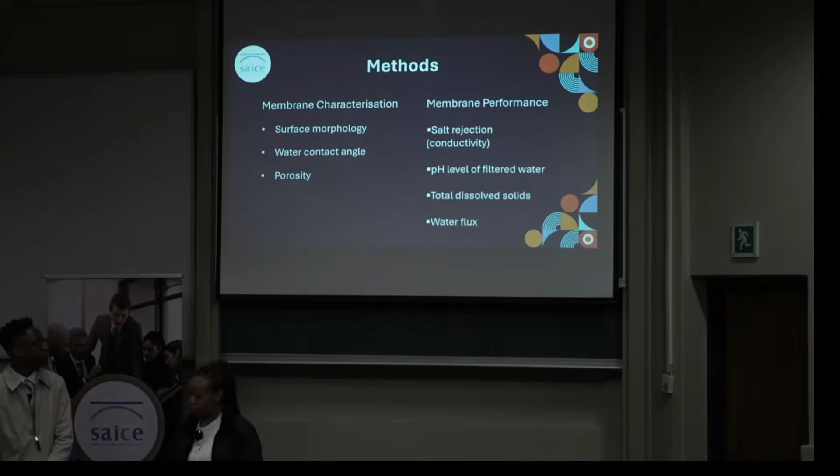To understand how these compositional changes affect the membranes, membrane characterization was carried out. Membrane characterization involves studying the properties and behavior of membranes, which is essential for their efficient application and for determining the most suitable operating conditions in separation processes.

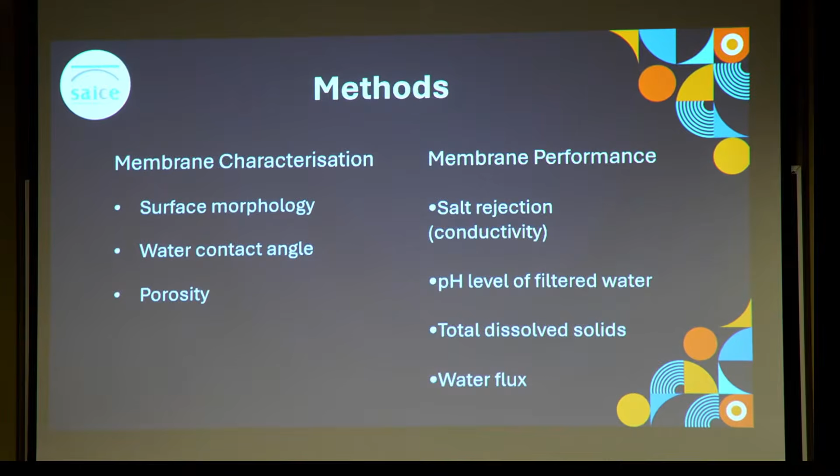For characterization, we measure the water contact angle, which is the angle formed between a water droplet and the membrane surface. This indicates surface hydrophilicity. We also determine the porosity and characterize the membranes in terms of their surface properties. To evaluate membrane performance, the conductivity, total dissolved solids, and pH of the filtered water was measured, and then the salt rejection and water flux of the membranes was determined.

In terms of handling, the membranes demonstrated generally good structural integrity, and they could be lifted up without deformation, which was a sign that they possessed sufficient flexibility and robustness for practical applications. These favorable mechanical characteristics are also expected to hold true in larger industrial productions, as they depend on intrinsic chemical properties and not the dimensions of the final product.

Finally, after undergoing interfacial polymerization, the membranes did not display any visible physical alterations. This lack of observable change on the surface indicates that the interfacial polymerization process proceeded uniformly, imparting the expected functional properties on the membranes without affecting their physical appearance.

Turning our attention to the characterization of the membranes, several important trends were observed. The water contact angle results showed that all the membranes were hydrophilic, with values below 90 degrees confirming their suitability for desalination. Interestingly, the introduction of PIL produced a nonlinear effect on hydrophilicity. Small additions of the PIL initially increased the contact angle, but further incorporations in membranes 3 and 4 significantly reduced it, indicating improved hydrophilicity.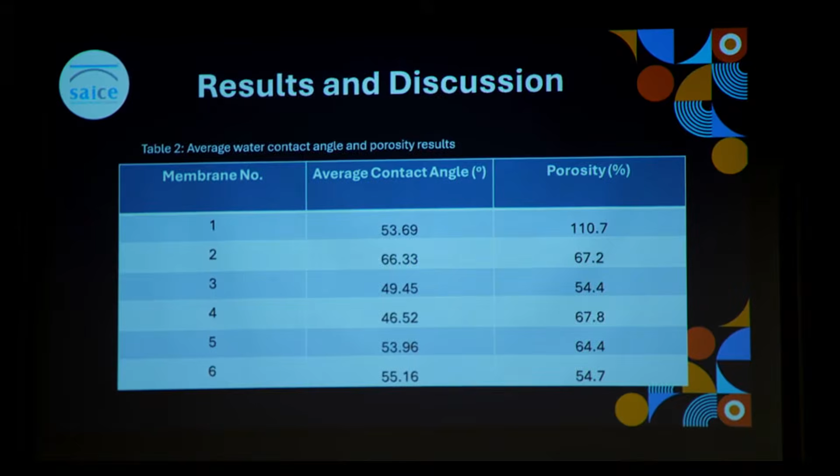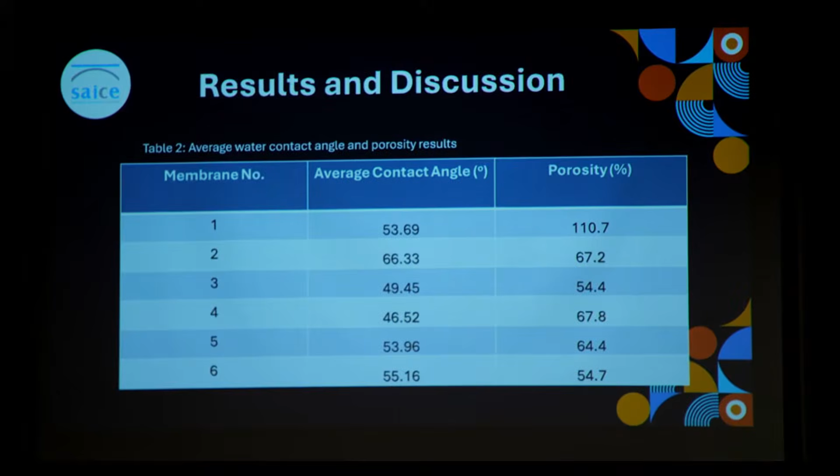Porosity measurements further confirmed the complex influence of PILs on membrane structure. While most of the membranes had moderate porosity, membrane 1 stood out with a value above 100%, which is not physically realistic. This was likely due to membrane swelling or experimental variation. Overall, the lack of a consistent trend suggests that factors such as swelling behavior and structural distortion play significant roles in determining porosity.

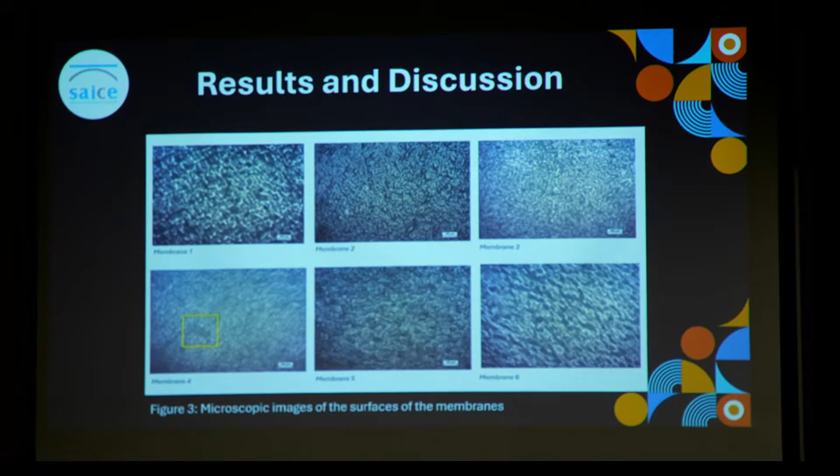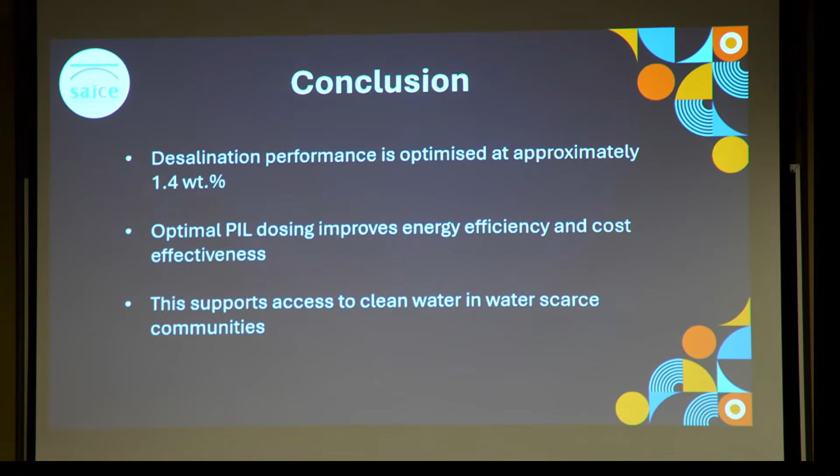Ultimately, advancements like these contribute to making desalination a more viable solution for water-scarce regions, helping to improve access to clean water, particularly for underserved and vulnerable communities, while also reducing the environmental footprint associated with large-scale water purification.

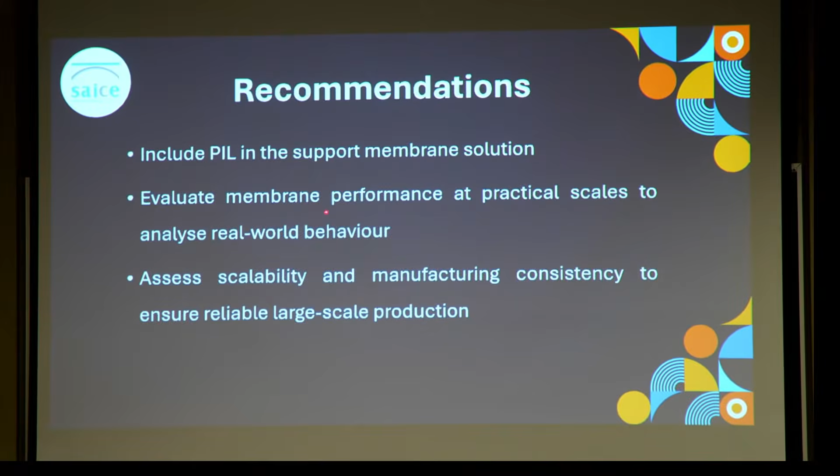It is recommended that future investigations incorporate the PIL into the membrane support solution rather than adding it after the support membranes have already formed, to better improve integration. It is also recommended that larger membranes be fabricated and tested to better align the results with what is expected in commercial desalination plants. Thank you.

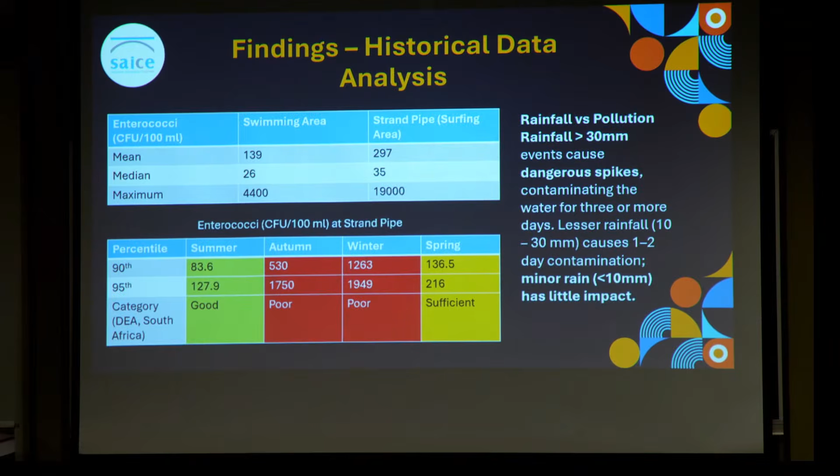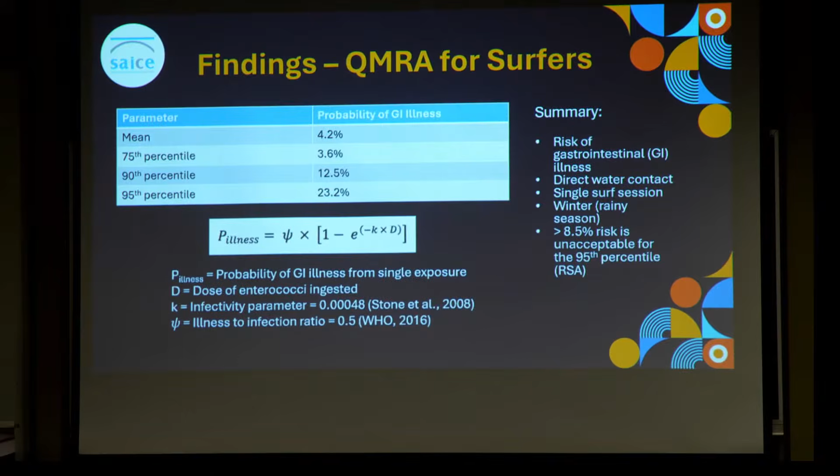Now moving on to the potential sources in the area, there are several interconnected sources that are driving the poor water quality, especially in winter. The Lourens River acts as a conduit for all the pollution from upstream, which includes urban areas, informal settlements, and agricultural land. So this contamination is carried downstream and released straight at the river mouth, which is very close to the surfing area at Strand.

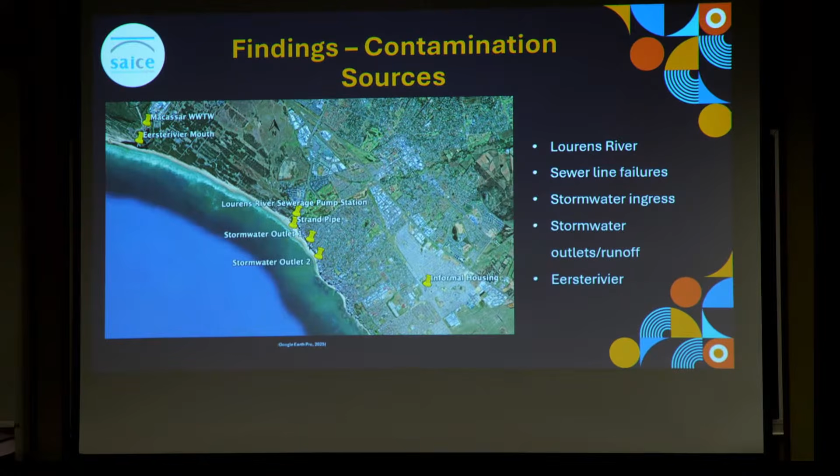So yeah, the surfing area experiences worse contamination compared to the swimming area, which is just down the beach. And that shows in my field sampling results as well.

Just an interesting one, the sewage pump station located at the river mouth failed in July 2025, and it coincided with some very high pollution levels recorded.

The sewer network in Strand is also a problem. The sewer line is a gravity-fed sewer line which carries flow from the whole of Strand down to that pump station, and it has a history of blockages and spillages. It collapsed in February 2025, and it caused a major overflow with beach closures.

Heavy rainfall obviously adds to the stormwater and the gravity-fed sewer system, and this can overload the pump station and cause further leaks.

On top of that, the stormwater outlets along the beach, including two very close to the main swimming area - those two that are tested - carry high levels of bacteria. This is likely from leaking sewage, urban runoff, and areas with poor sanitation, such as that one I highlighted there in the picture.

And finally, the Eersterivier, which enters the ocean less than 10 kilometers away, can bring additional pollution. This is where the pump station pumps all of its sewage to, and that's located right at the river mouth. So any spillages or problems there, the sewage can go straight into the ocean.

So what does this all mean? Well, I confirm that rainfall is a major driver of coastal pollution, and that it lingers in the sea for quite a while, depending on the intensity.

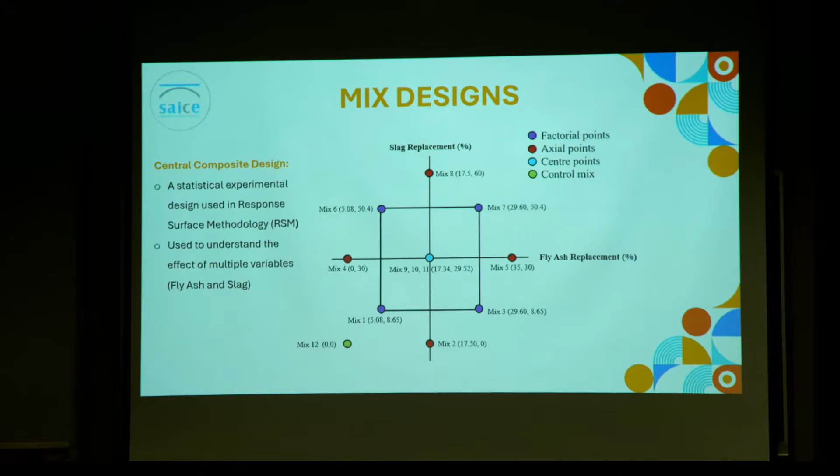A total of 11 mix designs were obtained from the central composite design, with the 12th mix containing no slag and no fly ash to serve as a reference.

All cements were tested under SANS and European standards, allowing cements with low clinker content to be classified as CEM6s, a classification that has not yet been standardized in South Africa.

The research evaluated the performance based on fresh properties such as workability and heat of hydration, mechanical properties including compressive and splitting tensile strength, and durability through oxygen permeability index, porosity, and carbonation. All tests were conducted under 2 curing regimes: a 25-degree water bath, and outdoor curing to simulate on-site conditions.

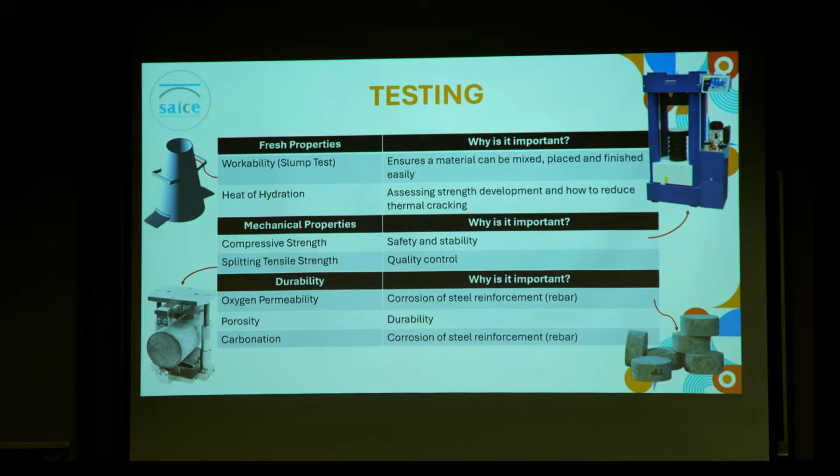The purpose of conducting such a range of experiments was to ensure that the results are evaluated comprehensively. This holistic approach strengthens the findings of the results and also shows its viability for real-world application.

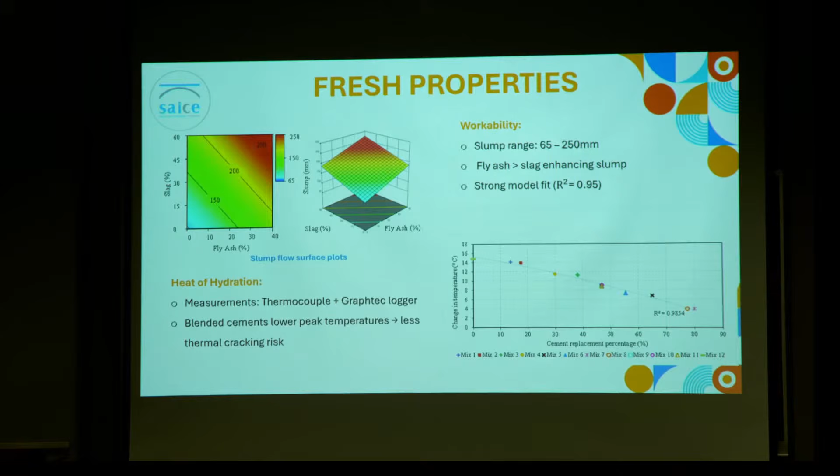This aids in preventing thermal cracking during mass concrete pours.

Compressive strength was tested at 7, 28, and 90 days for both curing conditions, and linear models with coefficients of determination ranging from 0.89 to 0.98 were developed. All mixes exhibited low early age strength, ranging from about 7 to 35 MPa, followed by a notable strength gain up until 90 days.

However, the mixes containing supplementary cementitious materials did not achieve higher compressive strength than the pure cement mix, which contradicted literature suggesting that fly ash and slag enhance long-term strength. A possible reason is the insufficient amount of cement available to react with the pozzolanic materials. Still, most of my mixes achieved around 30 MPa, which is perfect for typical home structures, offices, and other standard structures.

While the gray or colorless regions represented carbonated zones with reduced alkalinity. This distinct color change allowed the carbonation depth to be clearly identified, with the boundary between the purple and gray regions representing the point to which carbon had penetrated the concrete.

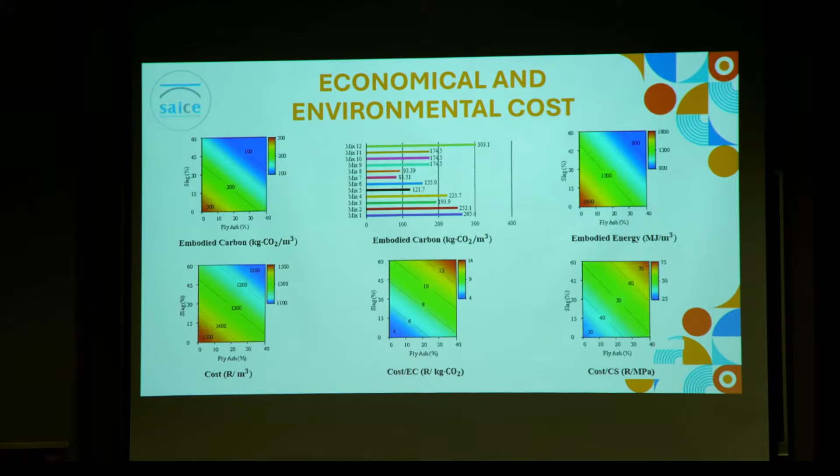To determine the optimal ranges of fly ash and slag that yield environmentally friendly concrete, variables such as cost, embodied carbon, embodied energy, accelerated carbonation, and compressive strength at 90 days were analyzed. The results demonstrated that a combined replacement of 55% can reliably achieve 15 MPa strength, while a combined replacement of 45% can achieve 30 MPa strength.

These findings suggest that moderate levels of cement substitution can maintain concrete performance while supporting sustainability in future infrastructure development. To put this in perspective, producing 1 cubic meter with a 45% cement replacement can reduce emissions by 180 kilograms of CO2. This is equivalent to driving a standard passenger car for about 800 kilometers.

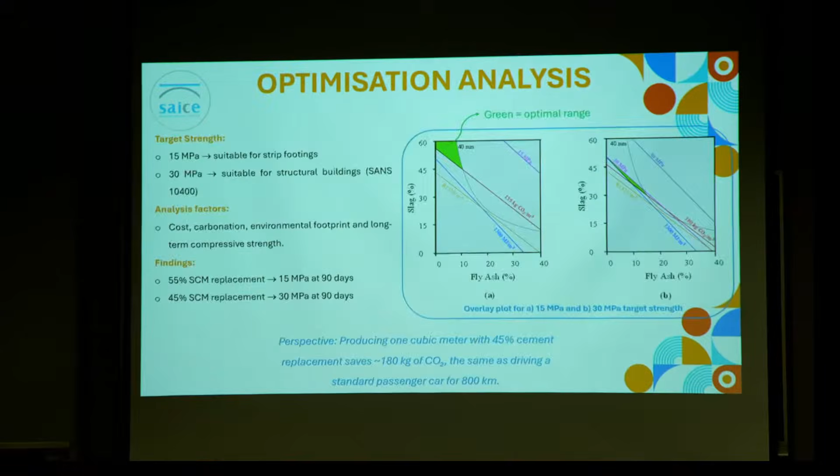So why does this research matter, and what does this mean for the way we build in South Africa currently? At present, the EN 197-1 European standard permits cement replacements of up to 90% with fly ash and 95% with slag. Yet South Africa continues to operate within far more conservative limits, 65% and 40% respectively.

Part of this hesitation stems from the fact that our fly ash is often unclassified due to its origin as a waste product, whereas European fly ash is generally of higher, more consistent quality. However, there still is a significant middle ground, a space where South Africa can responsibly push its standards further.

And here's the uncomfortable truth that I mentioned at the beginning. South Africa and Europe produce comparable levels of CO2, yet Europe is 8 times larger. That means our industry is being disproportionately cautious in comparison to our area.

So the real question is, why are we not doing more? Why is the widespread inclusion of fly ash and slag still treated as an optional sustainability feature instead of a standard expectation? The research presented today has shown that slag and fly ash are economically advantageous, environmentally superior, and technically feasible.

The mixes developed in the study are not niche high-end solutions. They are viable for everyday construction, from conventional buildings to mass social housing, not just for elite Green Star buildings. If we're serious about decarbonizing our built environment, then incremental change is no longer enough.